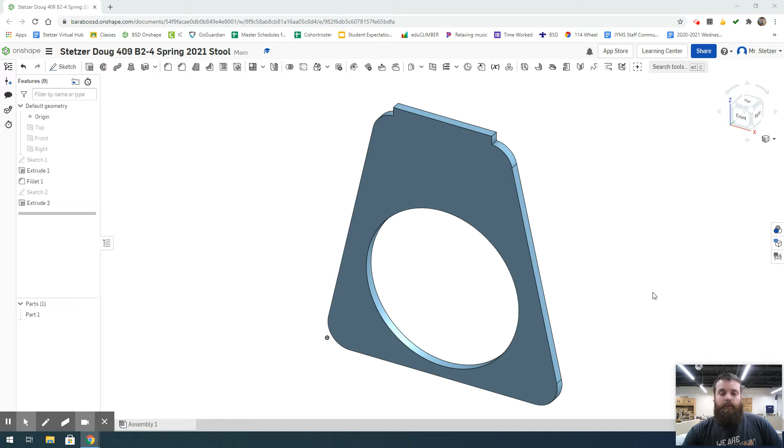To start our project, I'm going to click the front face of our leg, and then I'm going to click Sketch. I'm going to rotate this so that it's at a flat front view by clicking the front in the orientation cube.

If you have a computer mouse like I'm using, you can easily zoom in by placing your cursor where you would like to zoom and then rolling. To zoom out, roll forward; to zoom in, we roll backwards.

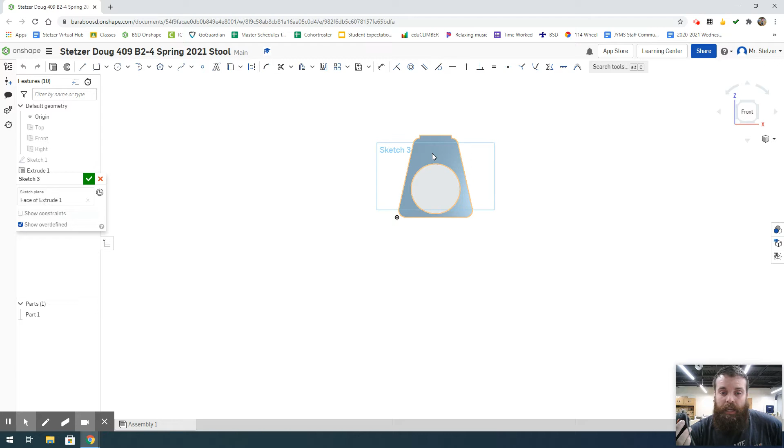This setting can be changed depending on your program, in the program settings. You can do the same thing with a mouse pad on a Chromebook or other laptop, tablet, cell phone, or other devices by placing your cursor and then either stretching your fingers or pinching them in.

What I'm going to do is zoom in towards the base of this object, and I'm going to start with the construction line. So I'm going to select my line tool, shortcut key L, and select construction, shortcut key Q.

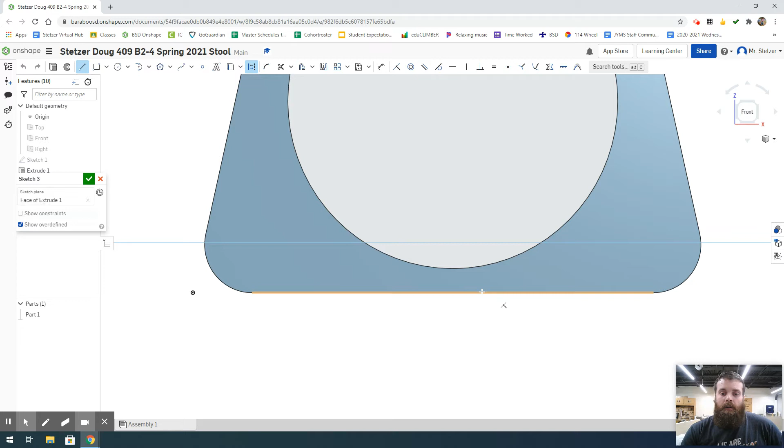I'm going to hover over the bottom edge of this feature and find the midpoint, that center point. Once I have that center point constraint to the lower right, I'm going to click once. I'm going to move this straight up to the circle. I can double click and it should place my second point and exit me out of the tool.

If it didn't exit you out of the tool and you're still dragging around that construction line, hit escape on your keyboard and it will exit you out. You can see I still have that construction line tool up, and I don't want that, so I'm going to hit escape to make sure I'm out of that tool.

Next, we want to create an arc. We're actually going to create an arc on the left and the right side of this center line, but using the skills we have from the Learning Center, we're going to mirror that, so we only have to do it once. I'm going to come up to my arc tools.

Right now I have a tangent arc. We don't want a tangent arc, so I'm going to select the drop down arrow and select a 3-point arc. My first point I'm going to drop, and it's going to be snapped to the circle.

My second point is going to be snapped to that baseline. If it's not orange, you're not on that spot. Next, we want to just have a slight inward angle.

We can drag this all around and it moves it. We want this to be inward towards our construction line. From here, to make sure we exit the tool, I'm going to hit escape.

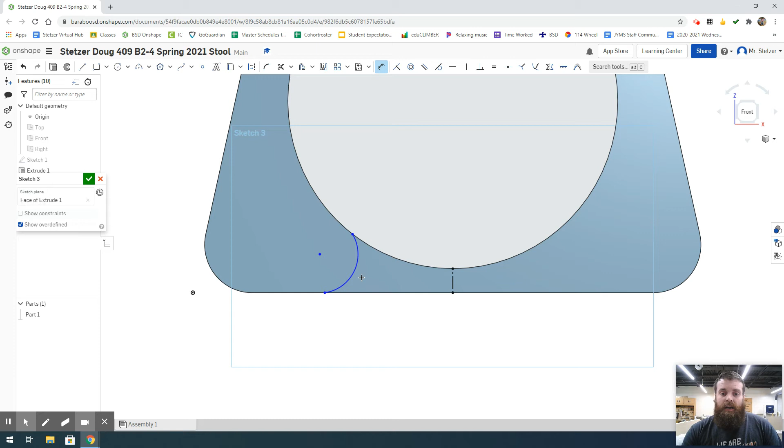And this is going to be pretty simple. I'm going to come up and use my dimension tool, shortcut key D. I'm going to select the circle or the arc, and I'm going to give this a radius of 2.

Next, since this still isn't fully defined, we want to make this tangent to the circle and to this baseline. I'm going to come up and find my tangent constraint, shortcut key T. I'm going to select my circle, and then select my arc.

Now this creates a smooth curve and smooth contour. Next, I want to create another tangent constraint, so I'm going to select my arc and the base of my feature. Now this has a smooth contour with a 2-inch radius going all the way through.

Rather than having to do multiple dimensioning, this gives us some other commands and locks this in. If we want to see our constraints, we can come over to our sketch window, click Show Constraints, and we can see all of those constraints: 2 coincident, 2 tangent, and then we have our center line.

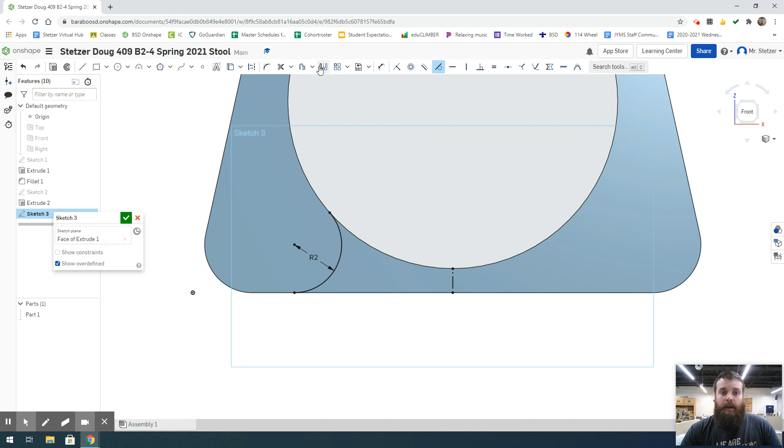To mirror this to the opposite side, I'm going to come up to my tools and find my mirror tool. I'm going to select the mirror line, which should be our center line, and select the entities to be mirrored, our arc. Once I have this, I should be able to click my green check mark, and I've created those arcs.

In the next video, I'll show you how to connect them and then extrude that feature out.